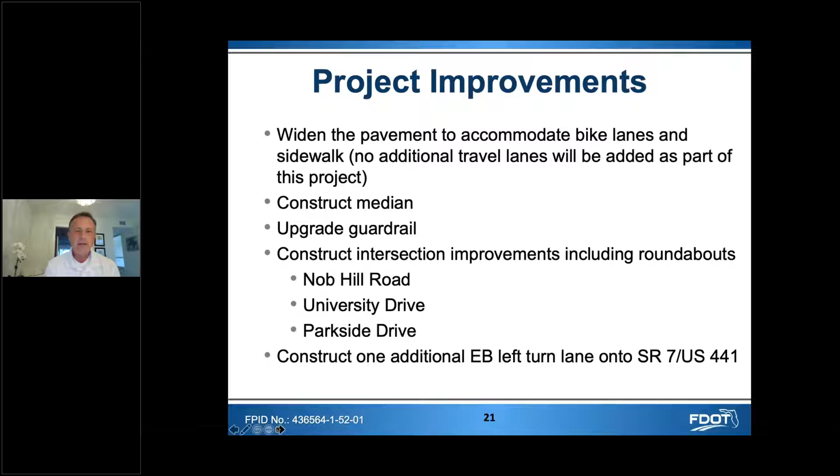We are constructing intersection improvements, including roundabouts, specifically at Nob Hill Road, University Drive, and Parkside Drive. And we're also constructing an additional eastbound left turn lane at the State Road 7 approach, State Road 7 intersection. Next slide, 22, please.

So along the corridor, there are 4 typical sections that vary between different segments of the project. The widths of the proposed bike lane, the median, and the sidewalk vary depending on the typical and due to the available right-of-way. So starting at the west end of the project, the first typical extends from the Wildlife Refuge over to University Drive, and as shown here, it includes a 16.5-foot median, 2 11-foot travel lanes, a 7-foot buffered bike lane in each direction, and also there's an 8-foot existing sidewalk on the south side of the road that's going to remain. Next slide, 23, please.

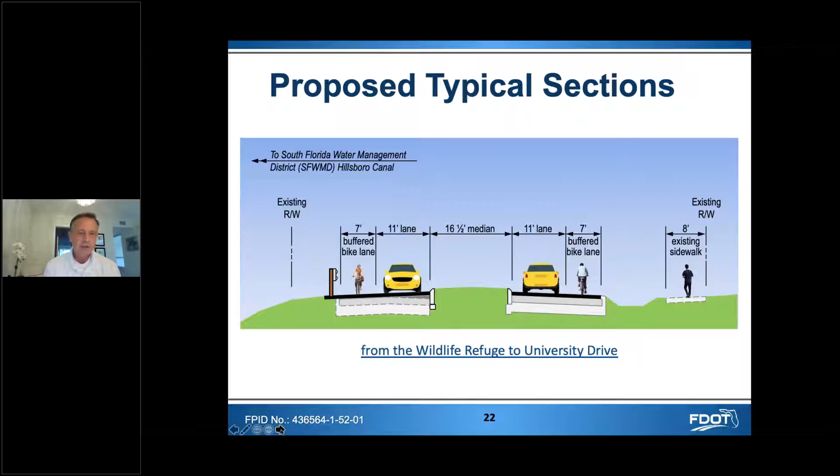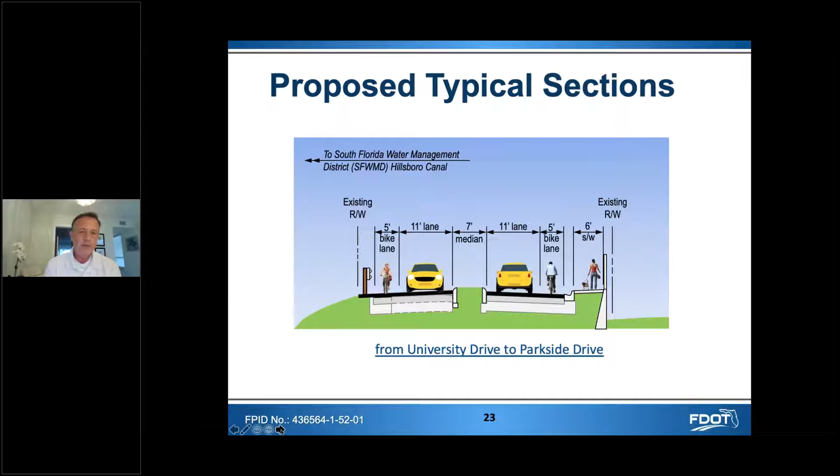So the next typical section goes from University Drive over to Parkside Drive, as you can see here. In this typical, we have a 7-foot raised median, 2 11-foot travel lanes, a 5-foot bike lane, and we are constructing a 6-foot sidewalk on the south side of the roadway. Next slide, 24, please.

So from Parkside Drive over to 620 feet east of Northwest 61st Way, the typical looks like this. We have 2 11-foot travel lanes. We no longer have space within the right-of-way for a median, so that was not part of this typical. We have 5-foot bike lanes in either direction, and we are constructing a 6-foot sidewalk on the south side of the roadway. Next slide, 25, please.

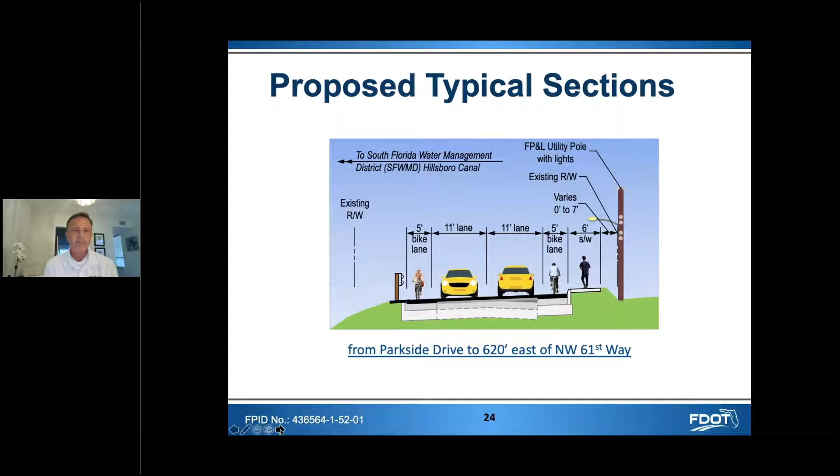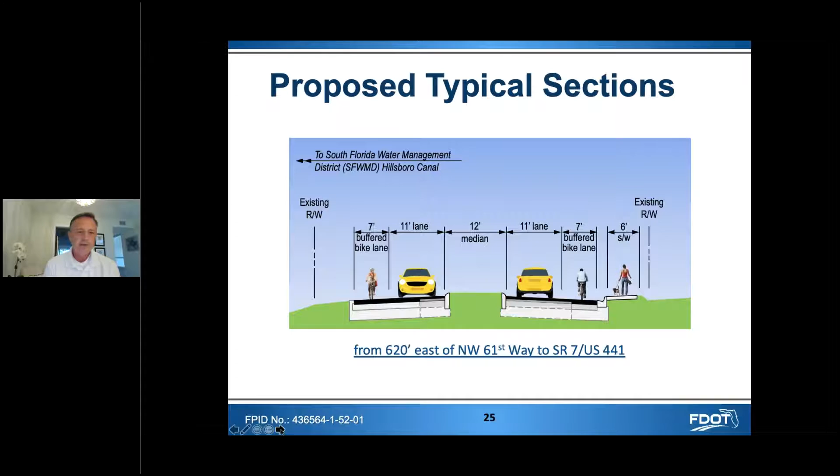So as I mentioned before, we are constructing roundabouts at 3 of the intersections along the corridor, including Nob Hill Road, University Drive, and Parkside Drive. And you can see a depiction here on this slide. One of the main, important features of a roundabout is its ability to calm traffic. And there's a lot of other safety benefits, which I'm going to talk about in just a minute, and a lot of other general features that are beneficial to a roadway corridor.

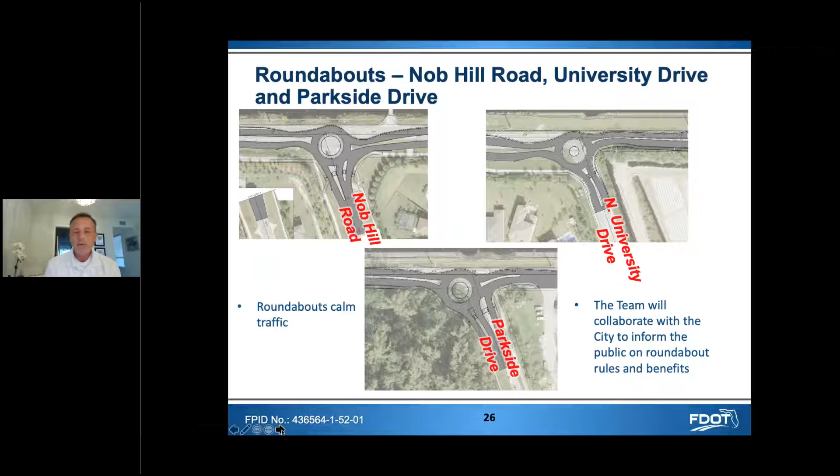But it's also something that the general public needs to get used to and be comfortable driving on. So the team is going to collaborate with the city in order to inform the public on roundabout rules and benefits at a future time. Next slide, 27, please.

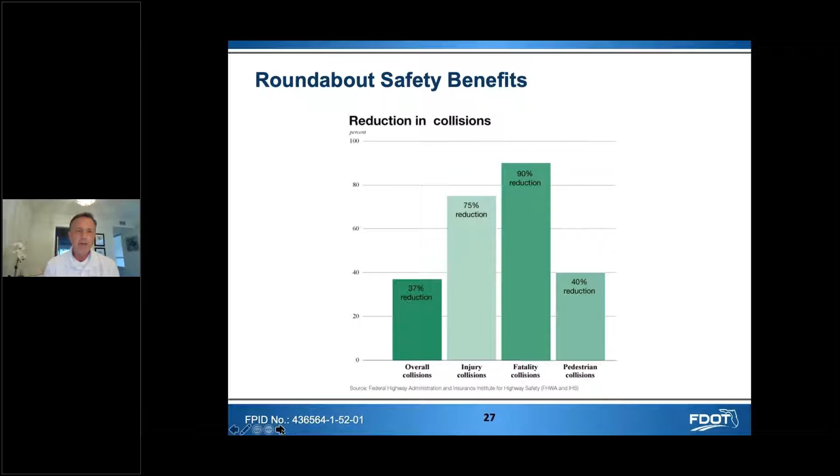So I mentioned there are a lot of safety benefits to a roundabout. This is a chart that's provided by the FHWA and depicts some of the main benefits of a roundabout in terms of safety. The first one there on the left, overall collisions are reduced by the introduction of a roundabout by 37%. Injury collisions are reduced by 75%, and fatalities are reduced by 90%. And pedestrian collisions are reduced by 40%. So very positive safety benefits with regard to roundabouts. Next slide, 28, please.

You might notice that there's a deliberate curvature of the lanes entering and exiting the intersection along Loxahatchee Road. This feature forces drivers to slow down as they enter the intersection and stay at a safe speed until they have exited on the other side. So by the nature of their design, the roundabouts allow for safer turning movements. And this will be especially helpful at University Drive, where the skewed nature of the intersection makes it very difficult for northbound approaching drivers to see left and right in the current conditions. So that'll be a big help.

Also at Nob Hill and Parkside Drive, the roundabouts include an additional feature referred to as a right turn bypass lane. This is an addition that helps traffic flow in a more efficient manner through the intersection. All three of the roundabouts are going to have lighting provided, and they've been designed to accommodate emergency vehicles and other large delivery trucks, school buses, and things of that nature.

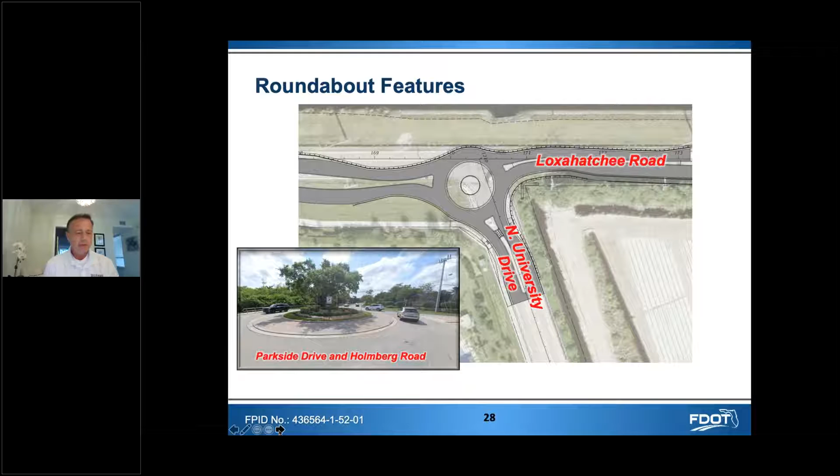So with regard to the maintenance of traffic, there are basically 5 different segments along the roadway where we have various approaches to the maintenance of traffic during construction, and I'll talk about those here. Construction is going to be completed using temporary lane closures and detours within segments 1, 2, and 3, starting from the west end at the refuge going east to Parkside Drive. Those will be a combination of lane closures with some detours, and then 4 and 5 will mostly be detours, using Hillsboro Boulevard as the primary detour.

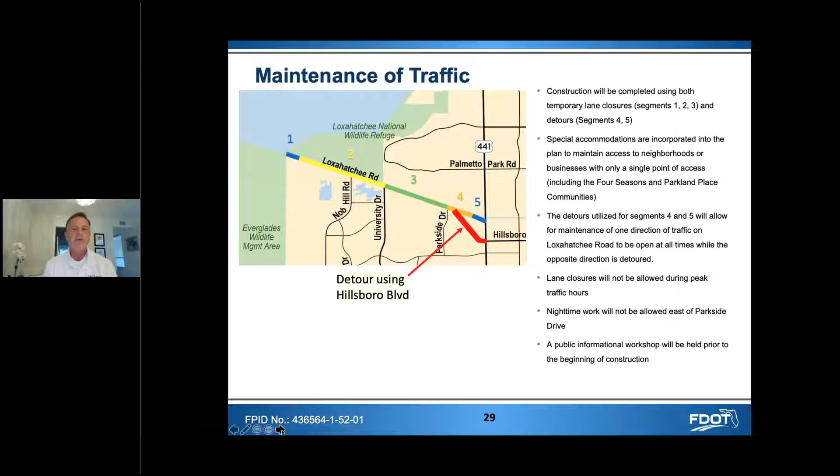There are special accommodations incorporated into the plan to maintain access to neighborhoods or businesses with only a single point of access. That includes the Four Seasons community, as well as the Parkland Place community. The detours for segments 4 and 5 will keep one direction of traffic on Loxahatchee Road open at all times while the opposite is detoured, and then it'll flip when the other side of the road has to be constructed. Lane closures are not going to be allowed during peak traffic hours. Lane closures and nighttime work will not be allowed east of Parkside Drive. And there will be a public informational workshop held prior to the beginning of construction. Next slide, 30, please.

So a little bit about the project status. The design is currently ahead of schedule and will be completed in May of 2022. Permit processing due to environmental and drainage impacts took some additional time, and while almost all the permits are now received, they did take quite a bit of time, which accounts for some of the extended time that the design has taken.

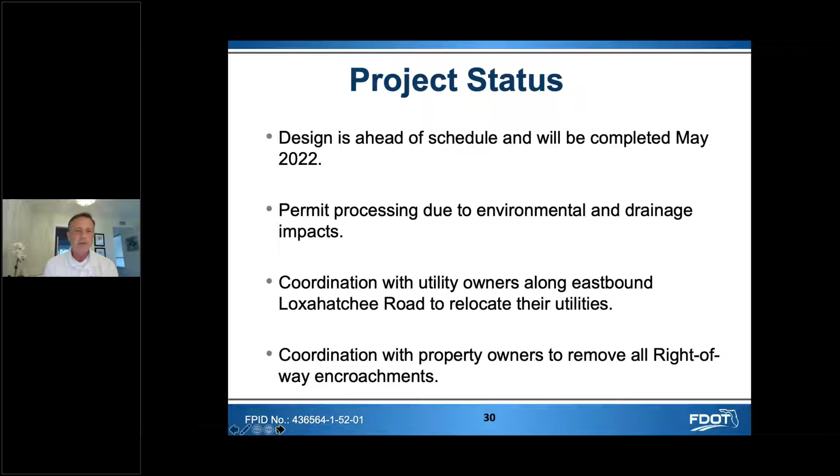There is coordination going on with the utility owners along eastbound Loxahatchee Road, mainly on the south side of the road. The widening of the roadway will impact those utilities overhead and underground, and FP&L has an undergrounding project ongoing, also replacing many of their wood poles in some sections with concrete poles. So that's all ongoing, plus there are some relocations as a result of the road widening. We're also coordinating with property owners to remove all the right-of-way encroachments and obtain harmonizing easements where we have driveway tie-ins that go outside of the existing right-of-way. Next slide, 31, please.

So a value engineering study was performed for this project in February of this year, and it generated a recommendation for an alternative typical section, which is currently under review for the segment from the Wildlife Refuge over to University Drive. Next slide, 32, please.

So the new typical section that's currently under review is shown here. It extends from the Wildlife Refuge over to University Drive. It includes two 12-foot travel lanes, a 12.5-foot median, and also 5-foot bike lanes in each direction with a 5-foot raised buffer between the bike lanes and the vehicular traffic. The 8-foot sidewalk on the south side remains just like on our original typical. Next slide, 33, please.

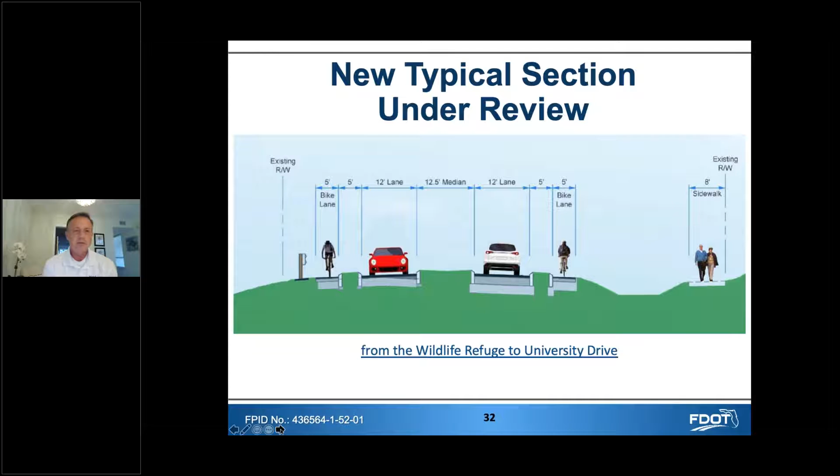So a noise analysis was conducted for this corridor, which resulted in the identification of 2 locations, specifically the Parkland Place and the Mayfair communities, where the existing noise levels exceed the FDOT noise abatement criteria levels. Additionally, the noise analysis provided a pre and post-construction comparison of the noise levels at these locations, which showed there will be no increase in the amount of noise within those communities as a result of the Loxahatchee Road project.

Next slide, 34, please. So even though there are 2 locations for which noise levels currently exceed the FDOT noise abatement criteria levels, the cost of any kind of noise abatement system cannot be included in this project because of the type of project that it is and the associated funding. Specifically, for a project to be evaluated and receive federal funding for any kind of noise abatement, it must be one of these following types as defined in the FHWA noise standard 23 CFR 772.

So as you can see here, type 1 is a project that involves substantial horizontal or vertical alteration of the roadway. Type 2 is a project that is solely a noise abatement project. And type 3 are any projects that are not classified under type 1 or type 2. Specifically, type 3 projects include construction of bicycle and pedestrian lanes, paths, and facilities.

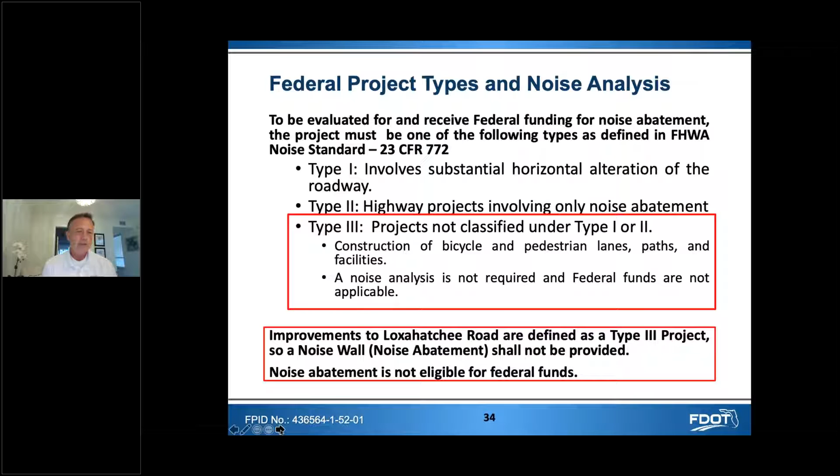So the Loxahatchee Road project is a type 3, and it should be noted that while the noise analysis was conducted for the project in an effort to be proactive, it is not required for projects of this type. And federal funds cannot be used to provide any sort of noise abatement. Next slide, 35, please.

So to summarize, a noise analysis was conducted for this project corridor, and it was provided to the city of Parkland. And as part of the study, it was determined that the existing noise levels exceed the FDOT noise abatement criteria at 2 locations, and therefore additional analyses were done at those locations to evaluate potential abatement measures. As mentioned previously, a noise barrier is not currently included in this project because it is not eligible for funding. Next slide, 36, please.

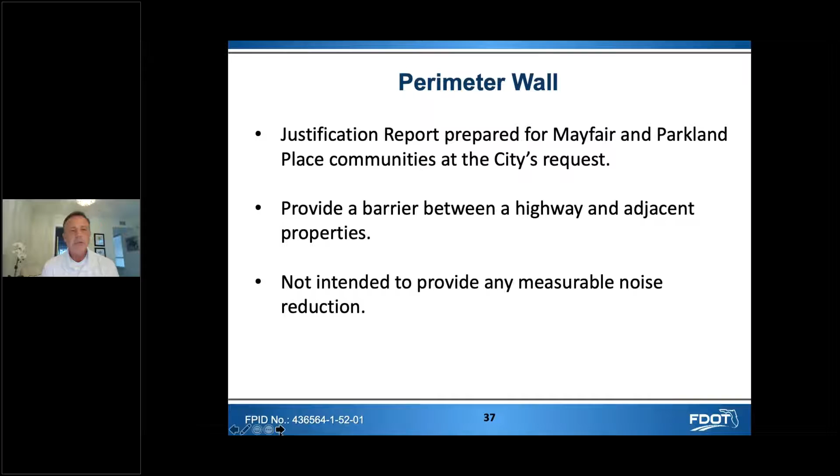So as I mentioned before, there are 2 locations where existing noise levels do exceed the FDOT noise abatement criteria levels, and those are at the Parkland Place and the Mayfair communities on the eastern end of the project. Next slide, 37, please. So at the city's request, a report was prepared which evaluated the use of a perimeter wall in the vicinity of the Parkland Place and Mayfair communities. And while a perimeter wall does provide a physical barrier between the highway and the adjacent properties, it is not intended to or capable of providing any measurable noise reduction. Next slide, 38, please.

So as I mentioned before, there are a lot of conflicts that would result in terms of trying to install either a noise wall or a perimeter wall in the area of these 2 communities, primarily because of the amount of utilities that are in the area, overhead and underground. And in order to relocate those utilities, which would be required to install the wall, there would need to be additional right-of-way acquired or obtained somehow so that the utilities have a location to relocate to.

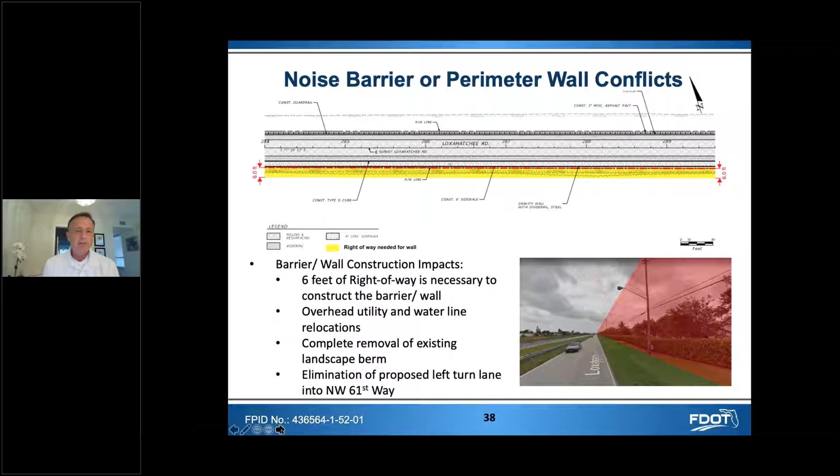It would also require the complete removal of the landscape berm that you can see there in the lower right of the slide. The wall installation would impact that berm as well. And then it would also require the elimination of the proposed left turn lane, which is a feature that is currently designed in the westbound direction and into Northwest 61st Way. Next slide, 39, please.

Great. Thank you so much, Scott, for that. You could go to slide 42, please. We are now going to begin our question and answer portion of the meeting. We're going to begin by first addressing the questions that have been submitted through the question box. Then we'll follow it by an open discussion portion where anyone will be able to ask a question or state a comment verbally. Remember that all questions and comments through these options are part of the public record for this virtual meeting and will be considered by the department during project decision making.